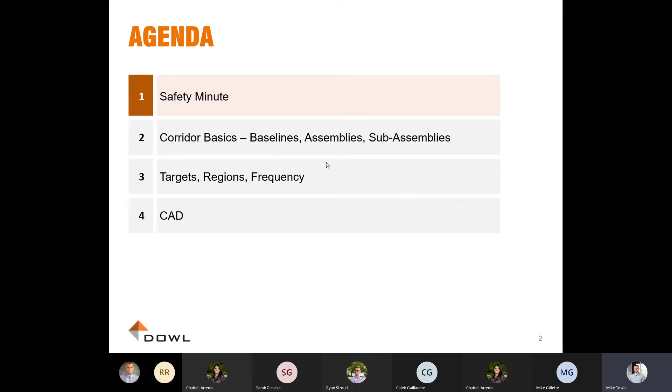So just a quick one as we're approaching Christmas time and New Year's. Theft does go up this time of year. My wife and I both had our cars broken into last week, as well as several others within about a 1.5 mile radius of our house, according to the Ring app. So keep in mind, make sure your cars are always locked. Keep valuables outside of your cars. If you are away, try and leave some lights on, or at least on timers. If you're having packages delivered, make sure that you're tracking those, and see if you can contact someone trusted if you're not able to pick that up right away off your front porch.

Follow up to Anna's presentation on Monday. Just be careful when you're cooking, and pay attention to stuff that's on the stove or in the oven, or if you are doing something outside with a deep fryer. I know some people like to do those. Keep any decorations, candles and lights in good working order, and always monitor any candles that are lit. Those are a pretty high cause of fires this time of year. Not much going on for most people with regards to travel this year. But if you are leaving for a long weekend, try not to post too much about it until you're back, so people don't know you're going to be gone. And if you are traveling, let someone know, just to keep an eye on your place while you're gone. All right.

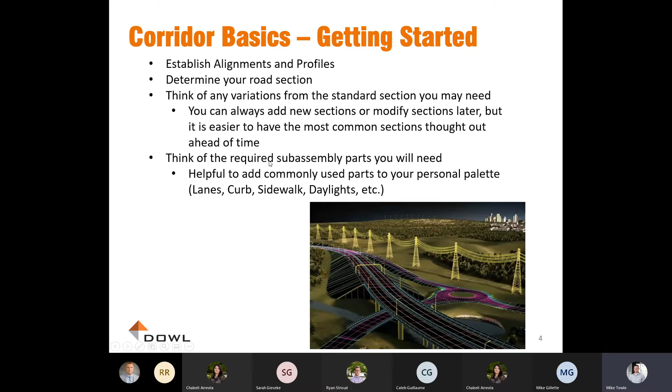So what are the required subassembly parts? We'll talk about what a subassembly part is, but effectively those are your lane pieces, your curbs, sidewalks, could be daylights, retaining walls, generic links for a stormwater planter, something like that. We'll talk a little more about those in just a second.

So the baseline is effectively the starting point of your corridor. The corridor is going to build outward from your baseline, and a corridor can have multiple baselines. Generally, those are established as your roadway centerline alignment. But your corridor can also have a baseline that could be your flow line, a curb return profile, maybe a saw cut line. It's essentially anywhere you're starting an alignment to work outward from to build your roadway section.

So that's kind of all the background stuff. I was going to jump into CAD. Does anyone have any questions on that before I get into CAD? Makes sense to me, Mike. Excellent. Well, I guess with that then, I will open up CAD. Can you guys see the CAD, or is it still the PDF or the PowerPoint? We can see your CAD. Excellent. All right.

So this is a project that we did down in Salem back in 2014. It was a Goodwill project that had the Goodwill building, 2 pad buildings. We vacated a street down the middle. We had frontage improvements on ODOT, frontage improvements on a city street, a new city street here, and a new extension of a city street here. So pretty extensive offsite improvements. Certainly not one you would try and do with feature lines.

I know that sometimes when we're just doing simple frontage improvements, it can be easy to want to just say, well, it's quicker and easier for me to just throw a couple feature lines on it and offset them back and call it good. But I really want to encourage people to think about what that is going to mean when potential revisions are needed, or when you get into needing to create your sheets for the submittal to the city, or whoever the jurisdiction is, in terms of what data are they going to require on the plan sheet, and how are they going to need to see it displayed.

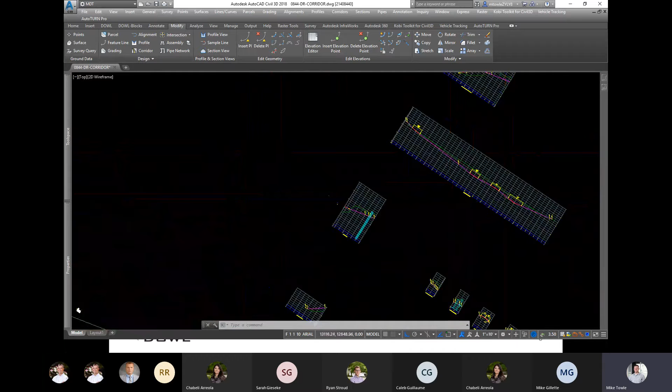So, I said the first step is establishing your alignment. So to save time, I just pulled the old file. We've got our alignments of all of our roadways here already set up. Over here, you can see we've already got all of our profiles built as well. So we'll skip that step. So the next piece is establishing what is your dominant roadway section. And we'll start with this one. So this one was effectively a 12-foot lane on each side with a 5-foot shoulder, and then a catch to daylight. And then we'll look at the second one. We'll ignore the swales because those add some complication, but it's all fairly straightforward once you understand how the corridors are set up and how they build the model.

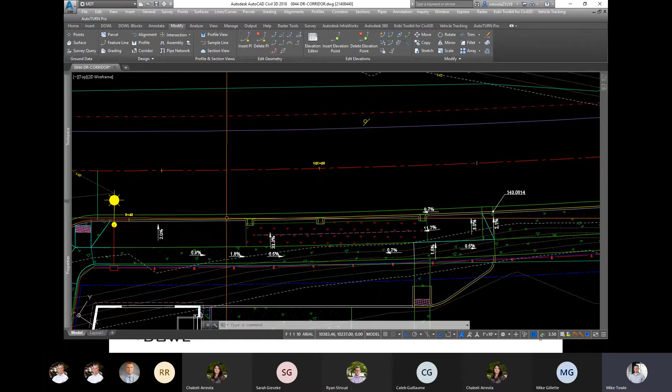So for now, we'll just assume that it's the roadway, curb and gutter, a planter strip, and a sidewalk. And in this case, because we're tying into our proposed finished grade surface, we don't really need a daylight on that section. So let's focus on, we'll build those two sections real quick.

And just as a tip that I always use if I'm working in corridors, is always have a split view. I don't think you guys will be able to see it, but with two monitors, I tend to basically minimize my CAD and then have the split of the two views centered on the monitors so I can have a full monitor view of each side. But, again, that's all just kind of personal preference. So let's go back over here.

And I'm sure you all know profiles and assemblies and stuff. This was the group of assemblies that we used to build the corridor model for this project. We'll kind of ignore those for now, but those all show up as true vertical. So this helps to have your 3D view set for one side or the other. So for now, we will ignore those. And we'll start with building our first assembly, which if you remember was basically just a 12-foot lane and a 5-foot shoulder with a catch line.

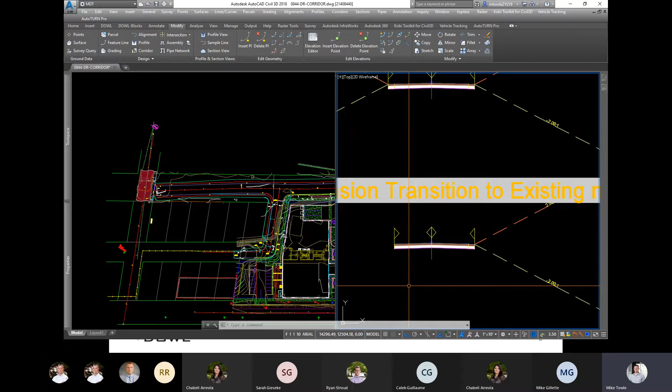So once you click that, it'll basically ask you where you want this to be placed. It doesn't really matter. Generally, I place them off to the side of the profiles and try and keep them organized by street. So you'll see all of these ones are Second Street. All of these ones down here are Melinda. And then I think I had some curb return ones up here. Yeah, so CR I use for curb return. So back to our assembly here.

So I think everyone should have a tool palette on the side that they can open up or add to a flyout window that's for Civil Imperial subassemblies. And I'll flip through some of these fairly quick. We've got some that are pre-built. I've never really used these. I suppose they work just fine, but it doesn't take a whole lot of time to just build one.

So your lane section, the one you're going to use the most is LaneSuperelevationAOR. That allows you, if you're building a detailed corridor, to add superelevation to it. That gets a whole heck of a lot more complicated. So if you are getting into a superelevated road section, I may be able to help. I've only done it a few times myself even. So that's generally the one you're using there.

Shoulders I don't really use. I don't really use medians much either. We're generally not getting into detailed enough corridors to do that. Curbs, I generally use UrbanCurbGutterGeneral. For some reason, sidewalks is in curbs as well. So UrbanSidewalk is what we use. And then this is a custom one that we have that I can send everyone, and you can load it into your tool palette.

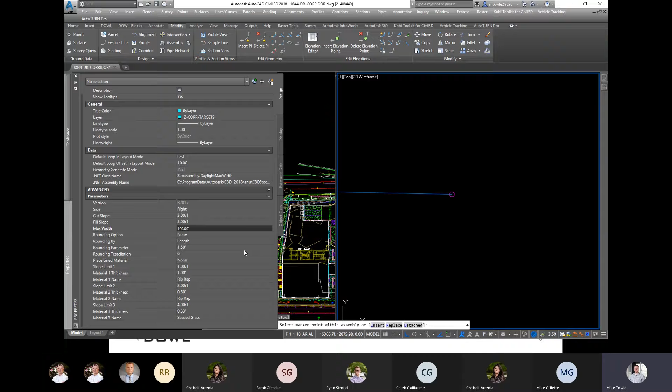If you say you don't care how far it goes to catch, you might want to just change that to 1,000 or 100 or whatever, something that certainly gets you beyond what you're looking for. That's generally the only things you really need to change there. And then it'll look something like that. It'll draw your line out to the maximum width that you typed in. So that is basically the right side of your assembly now.

If your left side matches, you can select the whole thing, right click and hit mirror, and then mirror it across your center line. Same side, no, sorry, here. It asked me if I wanted to mirror to the same side because I accidentally clicked the marker for the lane piece, the circle on the lane. But if you click the yellow X, that's the baseline.

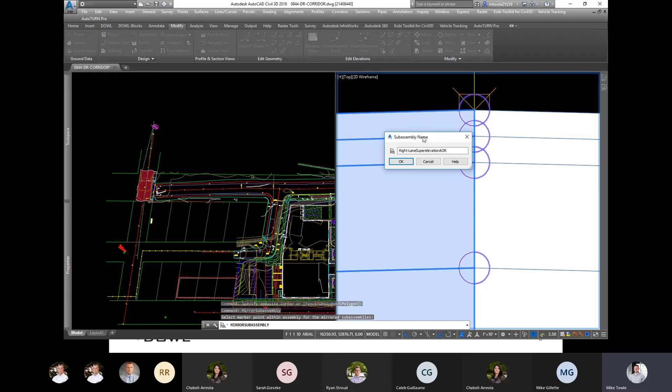So then what it'll do, it'll ask you to rename all those pieces. So it'll start from the baseline and work its way out. So now I'm on the left side, so I want to change that to left. I want to change this to left shoulder and left daylight. Okay, so that built your section there. If you needed to change the name of this for any reason, you can go to properties and change it up here. One thing that I also like to do is add a piece of MText below it.

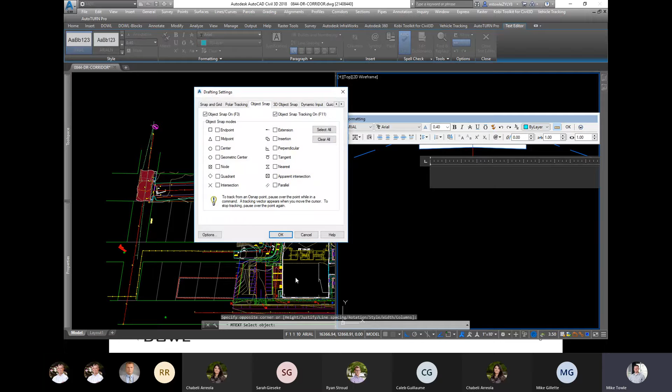And instead of just typing in the name of it, you can add a field for an object. And if you click this button up here, I don't know why the snap shows up, but you can just click on the baseline and it'll say the assembly, and you can click on name and it'll add the name of your assembly just below it, and it'll be linked to that. So if you change the name of this, it will update your MText after you regen, which is handy if you're looking at your assemblies and needing to quickly determine what you named something.

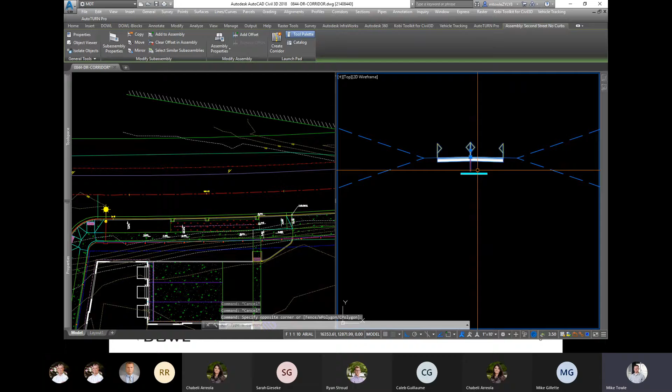So the other thing that you can do is, if you have an assembly that's very similar to this, so in our case, the next section that we have is with a sidewalk, but the left side stays the same, meaning it's just a shoulder with a daylight. So you can take this, and if you just select the baseline and the piece of text and copy that, it will copy the whole assembly. And if you regen, not rotate, regen, what just happened? Why did it name it the same? What do we got?

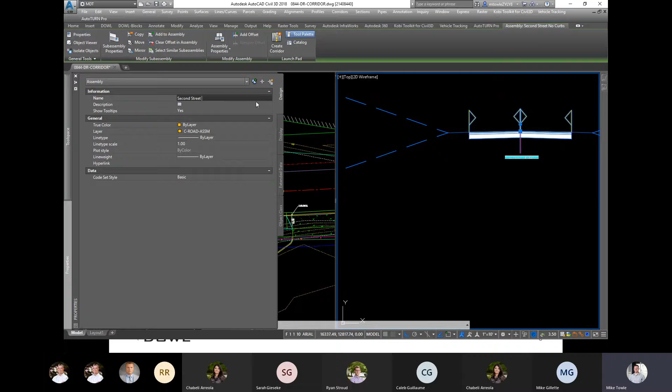Somehow those are the same name. But anyway, if you change that again, or 2nd Street sidewalk right, in theory, that piece of text should still be linked to the one that you copied. So you don't need to redo the field every time. As long as you copy the text with the baseline, it'll keep it.

So now we want to add a curb and sidewalk to the right side. So we can just select the daylight and the link and just hit delete. Go up to your tool palette again, add a curb here. Right curb and gutter, that's fine. And then urban sidewalk, and attach that there.

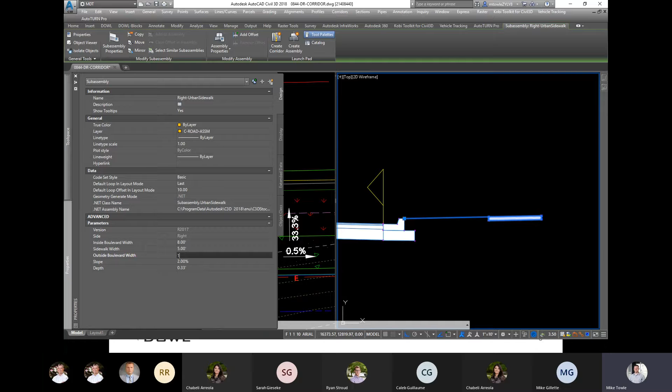And if you look at your sidewalk piece and go to the properties, there's an inside boulevard, a sidewalk width, and an outside boulevard. So what those will do is basically add a planter strip. So if you have an 8-foot planter, you can type in 8 feet. And in our case, our planter was 8 feet. Perfect. And then outside is, if you have a 1-foot separation to right of way, you can add in 1 foot, and that will only go at whatever the slope of your sidewalk is.

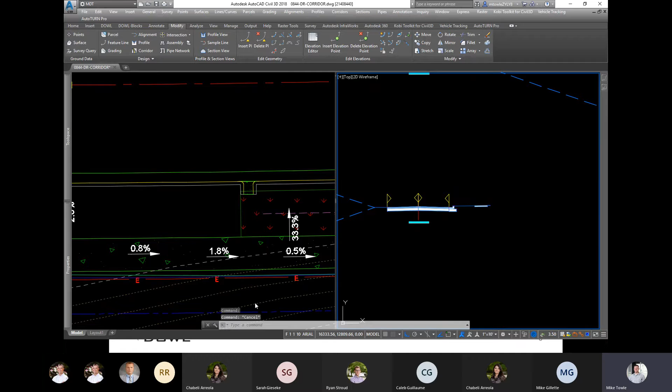However, if you have a variable sloped planter, you won't be able to use this for that. You would want to use a link, and you'd have to set a vertical target, and I can try and explain that later. We probably won't be able to actually build that, but we can talk about it. Okay, and then again, since we were tying into our proposed surface on site, we don't need a daylight over here. So let's just go back to one view for now.

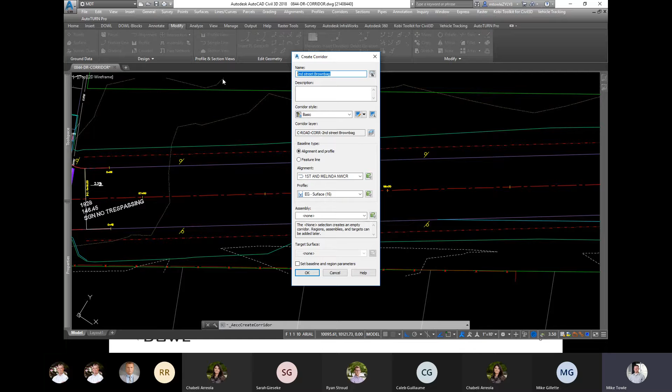So if we want to start building a new corridor, now that we've got our assemblies built, you can come up here to corridor and create corridor. Even if you have multiple roadways, you're likely only going to build one corridor model. If they're completely separated, you could build two. That would be fine. But if you've got an intersecting street, for example, this street and 2nd Street would be the same corridor model.

So when you're creating a corridor, you don't necessarily want to name it just 2nd Street or Melinda. You'd want to say offsite corridor or public street corridor, something descriptive that doesn't make it seem like it's only one of the streets. Corridor style basic is generally what we want. It'll always set up one baseline first, meaning it's going to start building whichever alignment you pick first. So in our case, we're going to build off 2nd Street first.

So it's asking what the baseline type is. Generally, we're going to build this off an alignment and profile, but technically you can build them off a feature line. Again, I wouldn't recommend that for a roadway. You should always be doing alignment profile. So if you're doing alignment profile, we'd want to select 2nd Street right-of-way center line, and your profile, assuming it's a new street, would be your FG, your finished grade center line profile.

Then it'll ask you what assembly you want for the initial build out of your corridor. You can leave this as none, and it won't really build anything at first. You can always add regions and change that later. But if 90% of your corridor is going to use the same section, it might be helpful to select your most common section and have it build all the way through, and then split and change regions as you go. If you have a lot of different regions, it may make sense to select none and build your corridor one segment at a time. So in our case, I'm just going to select no curbs and say that's our dominant corridor section.

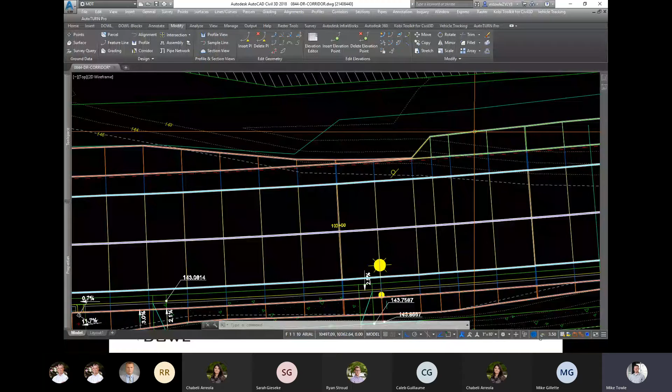You can see it calculates your catch line to existing. That's the outside line here. If it's green, at least in this style, green would mean you're in a fill, red would mean you're in a cut. So it differentiates between the cut and fills on your daylights. Where they come together, that's basically your transition point. So you can see, it basically built it out.

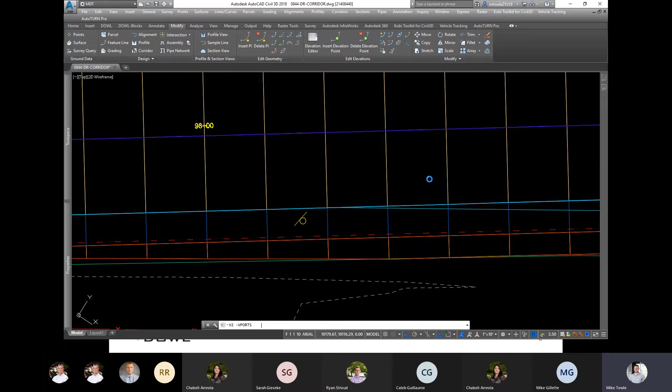The edge of roadway is right underneath the edge of the corridor. So each of these lines that's now drawn here represents basically a feature line that is built by the corridor on those endpoints of your assembly. So that is the outside edge of your lane. So every one of these circles effectively gets a feature line built at that location. And then again at the end here.

So you could, if you wanted to, extract those feature lines and use that as part of a tie-in. That might be what you'd want to do here. If you were tying your on-site surface into the off-site, you'd extract that feature line and add that to your FG surface on site to make that tie-in.

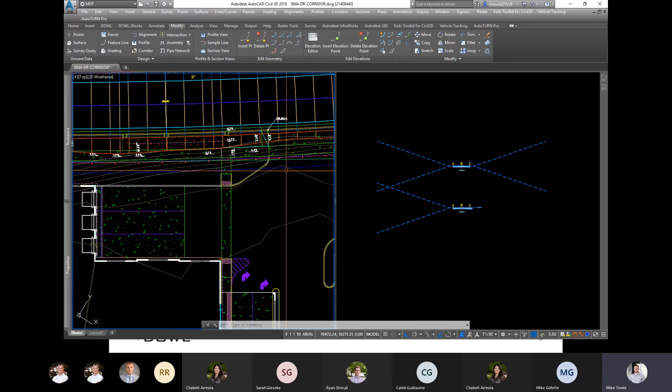With that said, we now know that we don't want to take this section through the intersection, because once we're on the other side of the intersection, we have a sidewalk. So if you want to basically switch a section to your sidewalk, you can click on the corridor. And you can see that it brings up basically a corridor ribbon. And this is really helpful for editing and adjusting kind of everything there is about your corridor from a design standpoint.

So this modify region tab basically lets you split a region, meaning if I split a region here at the endpoint of the curb return on this side, first it asks you which region you want to split, and then it'll ask you for the station. So these two sections are now different regions in the corridor. Granted, they're still using the same assembly.

So if you wanted to change that, you could click on region properties, select the region, and you can change the assembly to sidewalk right. That's what I wanted. And you can see that it'll change that to be your new section. So across an intersection, I don't necessarily want to build sidewalk here. So I'm going to split that region again, select it.

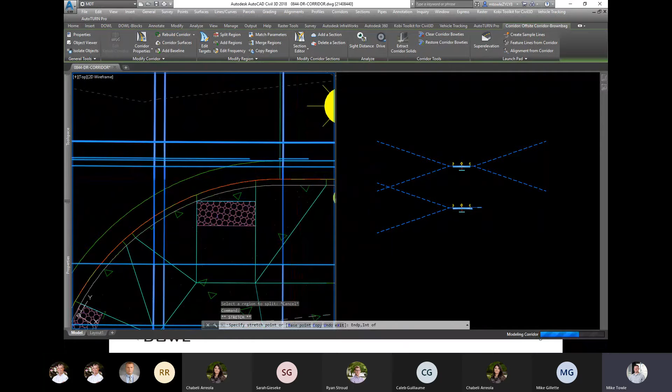And if you accidentally click the wrong spot, you can always just grab that grip and click on wherever you want to move it to, and it'll slide it to that point. Alternatively, you can right click and go to corridor properties and go to parameters. And you can see when we started, there was only one region under the baseline.

There's now 3. And you can see that it basically just changed the name and said no curbs copy, no curbs copy 2. You can edit those names to whatever you want. And it can be helpful to basically name those so that they match your assembly section.

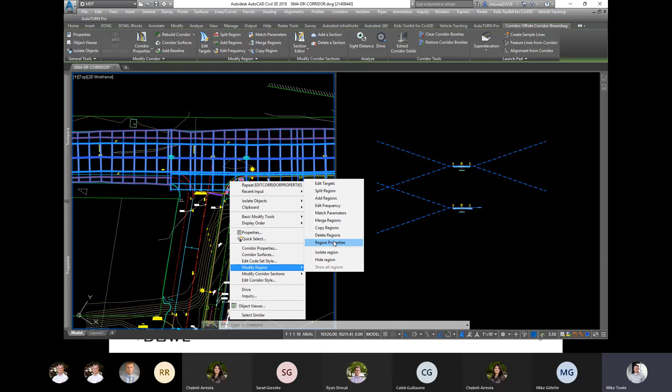Now that you've got that kind of split, again, we don't want to build sidewalk across here, so I'm going to modify the region. Again, you can right click on all this stuff, or most of it shows up in the ribbon. So if you wanted to modify that one, we could say 2nd Street, no right. And we didn't build that one. That's one that I think we had in there. I'm assuming that's what that was. Sure, that'll work.

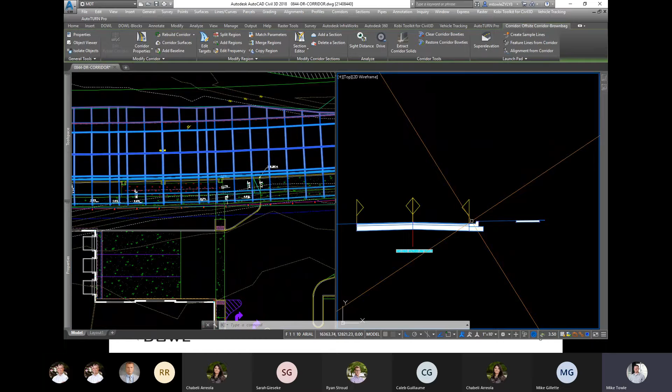Okay, so we've got kind of the main section of the corridor built. You can see it's calculating effectively to the back of walk, except where we got to this point, we had a wider road section. So we went to a 15-foot lane instead of a 12-foot lane. So if you recognize that, you can just come over to your assembly and change the width of your road.

And you can see it didn't do anything in the corridor yet. So you can click on it and hit rebuild corridor, and it'll update it automatically. And it'll recalculate all of those grades across your section to that point.

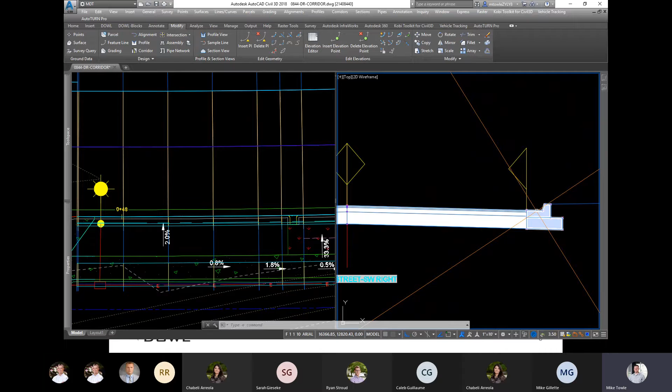The other piece of that is you can see that we've got a curb and gutter section in our assembly. So if you're not modeling that gutter, or if your road doesn't have a curb and gutter, then you need to change that gutter piece. And the curb is one of the more complicated ones to edit, because all it says is dimension A, B, C, D, E, F, G, and you can change all of those dimensions. Keep in mind, those are all in inches.

So to understand what those are, you can go to the tool palette, right click on it and hit help. And there's this kind of handy diagram that shows what all of those dimensions are. So the most common ones that we update are B, D, F, and E. So F is the top width of your curb, from the top face to the back of curb.

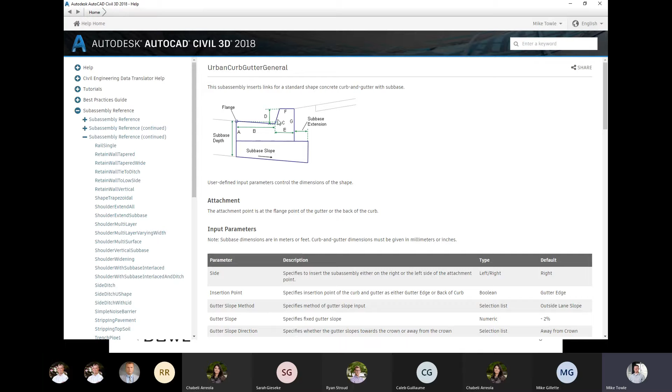E is the bottom width, meaning that when a corridor models a curb, it models it as a 3-line curb, meaning it's going to build 3 feature lines. When we model on-site curbs, we're generally drawing them as 2-line curbs, meaning bottom face and top back.

A corridor is going to model all 3 because a corridor cannot, I suppose you could do it with a 2-line and just skip this and you'd have to use a generic link, but a corridor cannot have a true vertical. You can't have 2 XY coordinates with the same elevation to it. So it's going to have a batter on the face of curb. So you're going to want to set F.

If you truly want to draw it as a 6-inch curb, you're going to want to try and draw F as 5 inches, E as 6 inches, and that'll make this line here, your flow line and your top back, 6 inches apart. And then B is your gutter width.

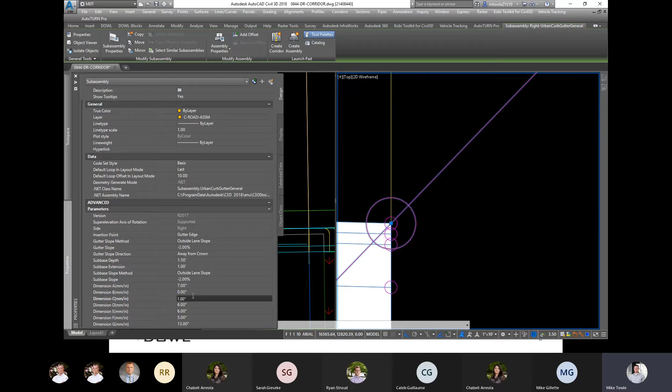And you'll see that if you type in 0, meaning no gutter pan, it freaks out because it's trying to put 2 points on the same location. So you want to put 0.001, and it'll basically fake in a point that is 1/1000th of an inch off. So it never impacts the model.

If you are modeling your gutter, you can change a couple different things. You can change your gutter slope, and if it's a shed section, you can change the slope of that going either negative or positive, and you can change the width of it again, using that B dimension. So hopefully that all makes sense. Again, so we just made a bunch of changes there.

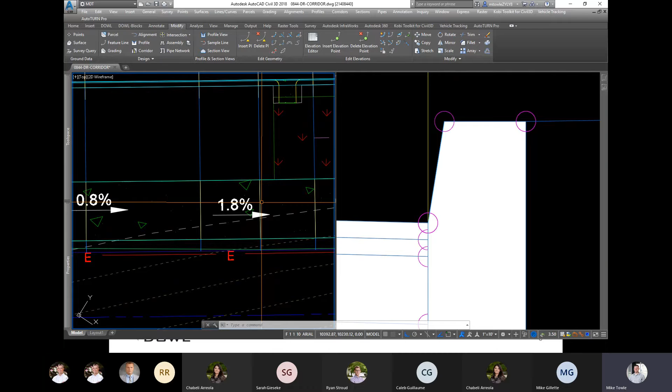Let's assume that we are not modeling a gutter pan. We don't have to change it again. And then you can see everything now lined up. The curb is on top of the curb, sidewalk's on the sidewalk, and we've got basically the sidewalk width and then a 1-foot extension at 1.5%.

So with that said, let's say that we realize, well, shoot, we needed to transition this part of the roadway here to a 15-foot width also. So that's what this is. So our road width changed at this point, once we came around this little curve in the road, it's going to slowly transition to 15 feet from 12.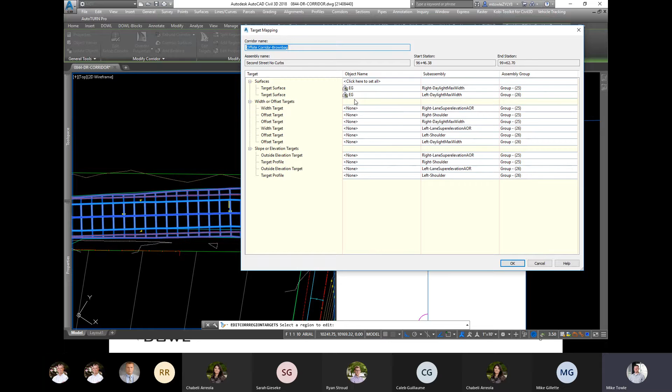So you can go into, again, select your corridor. Under modify region, you can click edit targets, select your region, and here's where the naming becomes really important if you have multiple assemblies or sub-assemblies within the same assembly. So it's gonna break it up into a couple different things. Surfaces, which is effectively your daylights, or any links that are linking to a surface.

It's going to break it up into width targets and then slope or elevation targets. So you can see that some of these are named, right lane super elevation. That was our pavement section. That shows up in both width and slope or elevation. That means that you could, if you wanted to, target a feature line or a profile with this right lane subassembly piece, and it would change the elevation regardless of the default slope that you put on that subassembly.

If you say we put 2.5%, if you have a feature line or a profile, you can target that profile for just a portion of your roadway, and it will change the grades and calculate the cross slope from the center line to whatever that profile elevation is. Does that make sense? Hopefully. Yes.

If it doesn't, feel free to raise your hand and I'll try and explain that differently. So a width target functions similarly in that it will target a line horizontally and adjust the width of the lane piece. So if you only pick a width target, it will continue at that width until it hits that line at whatever your default slope on your subassembly part was. So in our case, we don't want to change the elevation. We just want to change the width.

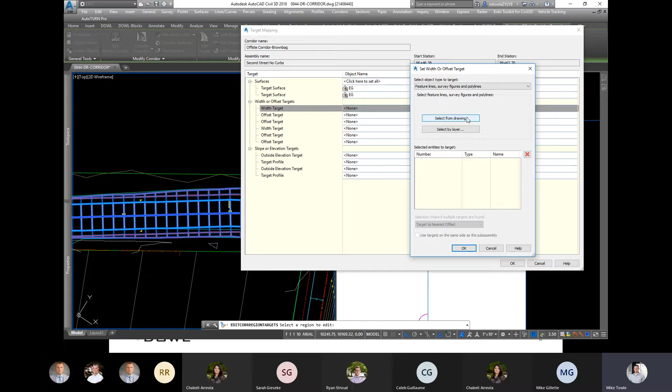So it gives you two options, either alignments or feature lines or polylines. I generally do all my targets, unless I've got a curb profile or something already drawn, I'll just generally draw polylines. Because generally you're just basically taking a nested copy of a curb line or something like that, and that's your target. So you can hit select from drawing, and then you can click on your line.

I will generally put all of these on a Z-corridor targets layer, just so that they're clear as to what they are. And you can see that what it does is it basically adds that as target number 1, it's a polyline, and then it adds a generic name to your polyline. You can have more than one polyline target per region for the same subassembly piece. And what it does is it'll go to whichever one it finds first, building out from center line.

So if that's the case, you can see if you named all of these without a right or left, it would be pretty much impossible to identify if you were on the left or right lane, or if you had more than one lane, it would name them both right lane super elevation AOR or AOR-1 or -2 or -3, however many you had. And if you didn't label them, you would never know which target you need to set. So that's why the naming piece is really important, especially if you're using more than one of the same piece per assembly.

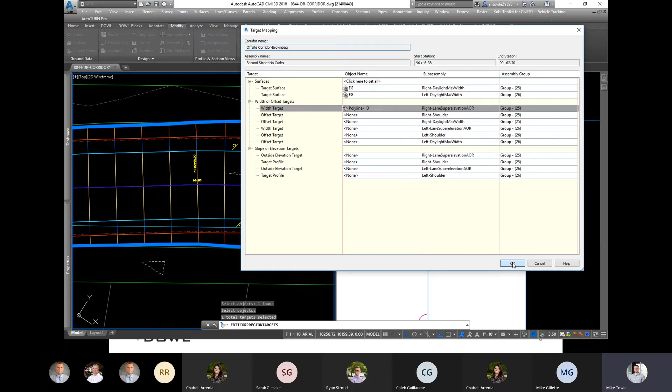Okay, so you saw that updated when I hit OK there. It basically took the width of the roadway now out to that target line, and then it adjusted the shoulder, adjusted the catch line with it. So one thing that's helpful with this is, before you even got any farther, you saw that our catch line is now outside of the right-of-way line. That would show that we'd need a wall or a steeper slope or a narrower shoulder, or we need to potentially offset the center line, or do something to the roadway section to avoid grading on someone else's property.

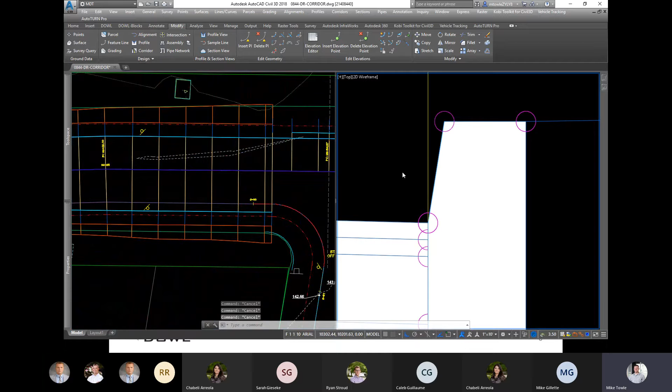Okay. Anyone have any questions? Well, I guess let's do this real quick. Let's look at frequency. I'll show you what that means. So this was our centerline profile for 2nd Street, and you can see we've got a couple different vertical curves, from 102 to 102.5, and another one from effectively 103 to 104. So those are somewhere right in here.

If we wanted to have a more frequent sample point along there so that it calculates the vertical curve a little bit smoother and makes your contours show up a little cleaner, you can again click on your corridor under the Modify Region tab, which, you can probably guess, is the one you use the most. You can click on Edit Frequency. And then again, it'll ask you which region you want to pick. We want to pick this one, if you only wanted to modify it for this one. If you wanted to change it corridor wide, you could go into the properties and change it for the whole thing.

But you can see here, this window pops up and it says you can increase the frequency along a tangent. I generally leave that around 10. If you've got a really straightforward road section that doesn't have a lot of grade breaks or horizontal change to it, or really any difference in the profile, say a 1,000-foot long road at 1%, you could probably increase this to 25, but most of the time we're doing small enough frontages that 10 probably makes sense.

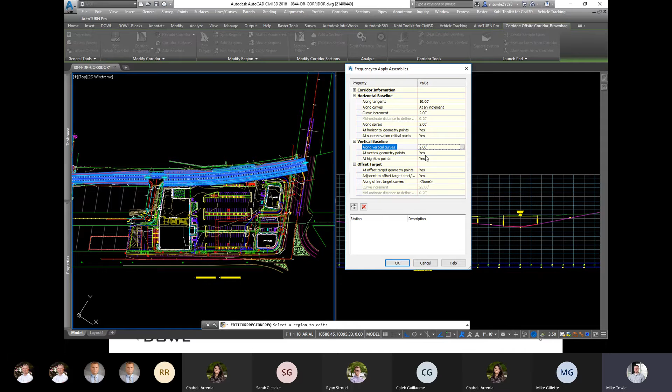You want to make sure that if you do have a target, you always have one at the geometry points of that target. So you'd want to have this at yes. And then make sure that you've got these boxes checked yes for high points, low points, any vertical geometry changes, horizontal geometry changes, things like that. So if you hit OK, you can see that effectively this whole thing is one giant curve. So it added a lot more sample points along the corridor length.

And you can see over here it didn't add anything. So if I were to change that back to 10 for a horizontal curve, you can see now it's only adding them at the vertical curve locations. So that's the frequency. If you needed for whatever reason to add a single frequency point or delete a frequency point, you can do that here.

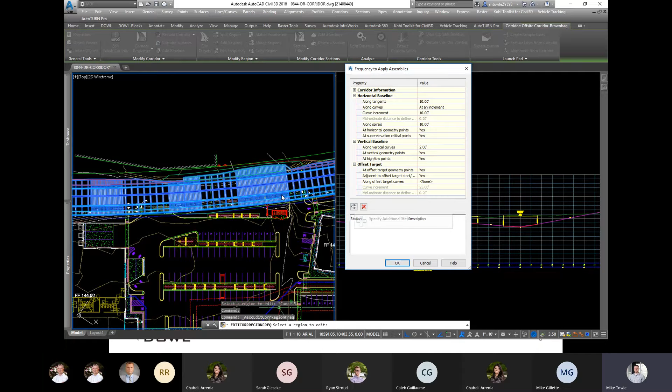Actually, I don't think you can delete a sample line. You can delete ones that you've added, but you can't delete one that's calculated by the model. But if there's a specific point that you wanted to have a sample line through, you can add one here and just select a station. Okay, I think that's the basics of building a corridor. But you'll notice that there's no surface here yet.

So to do that, you can click on it and click Corridor Surfaces, and it'll bring up this window here. There's a couple things that you want to do here. We're generally always building a top surface. But in theory, you could build a surface that's your subgrade, or a surface that's at the first lift of pavement, or whatever that is. Again, that's for building quantities or public road job type corridors. We're generally always going to want to build top.

And then you can either do data or links or feature lines. I'm pretty sure you want to build it as links. And then you can click create a surface here. They'll name it FG offsite corridor. You can change your surface style, whatever you want that to be. These don't really matter. And then you'll see that there's not really much you can do here. You have to click this plus to add the data to it. So it built the surface, but it wasn't going to have any data associated with it until you click that plus button.

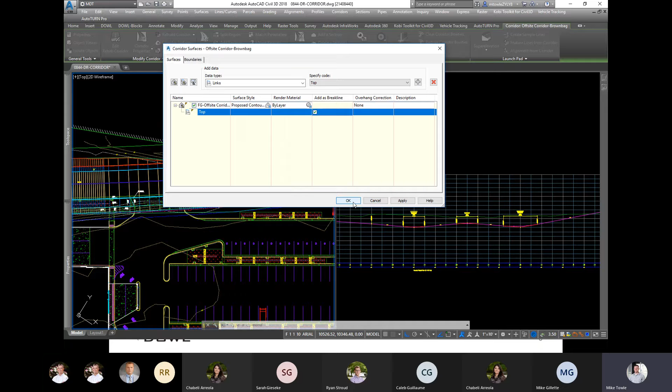And then I generally always click add as a break line. What that's going to do is add a break line at all of those marker points in your subassemblies. So if you hit OK, rebuild the corridor, now it'll add your surface. Let me see if I can turn that up. Actually, surface edit. So if you're looking at it from a TIN standpoint, it's going to add a TIN line across your baseline, across the edge of your lane line, your outside shoulder, and then out to your catch line, and then triangles between them.

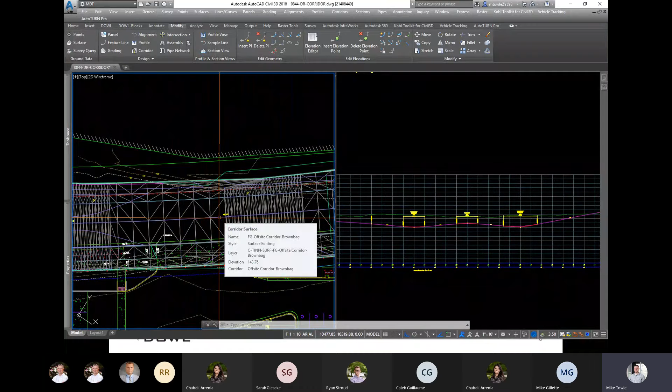You can see in vertical curves it makes your contours pretty smooth. They're rounded. You don't really need to add a smooth surface to a corridor. I would highly recommend you don't add surface smoothing to a corridor. In theory, if you built it right, you really shouldn't have any of those issues where you're tinning across center line, unless you're starting to mess with flipping faces. In very rare circumstances do you really need to change the way a triangle is tinning in a corridor if the corridor is built correctly.

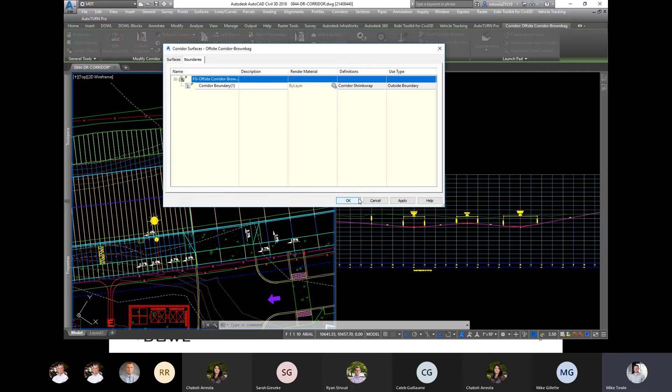What you do need to sometimes do is, you'll see that where we had our transition from a cut section to a fill section, it's tinning across those boundaries. So you can do a couple things. You can draw a boundary around your corridor, which is what I tend to do. I think it's easier and it works a little better, but you can get lucky sometimes and add a boundary that says add the corridor extents as the outer boundary. And that sometimes works. Let's see if it does here. So it worked in that case.

Where it tends not to work is occasionally if you start adding multiple sections to it, or having to add feature lines to the outside of it, or within your corridor limits. If you really want to think about how the corridor is going to build, you can build ADA ramps in your corridor. It takes a little time. It takes a lot of thought in terms of how the assembly is built, but in theory, you can do it. I generally don't do it that way, but what I do is build the curbs and then build the ramps with feature lines behind it.

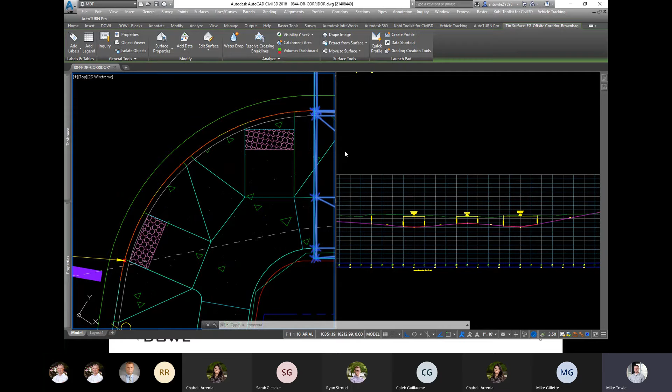So I try and get through top back of curb using the corridor, because those will always then be controlled by your profiles. When you're designing a road, the thing that changes most frequently when you're changing grades is your profiles. So your design of roadway is always built off profiles. And if you've got your curbs built in your corridor based on those profiles, then your back of curb is always going to be accurate.

Let's see. Does anyone have any questions on anything we've gone through so far? Those are kind of the high level basics of it. Does anyone have any questions on seeing an example of something? I was going to try and touch on what you do at a curb return or an intersection next. But does anyone have any questions on what we've done so far?

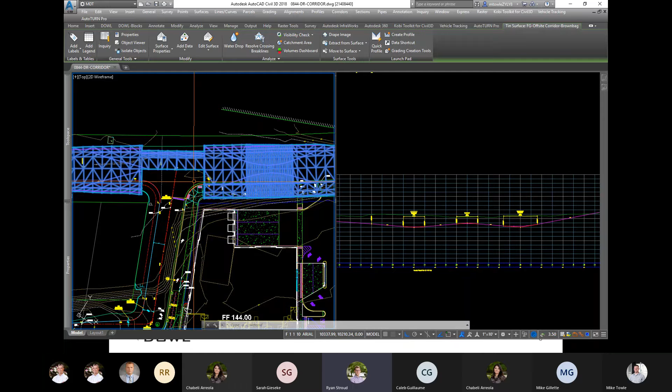I think I understand it to an extent. I'd have to actually do it to make sure I know it, but I think I got the concepts.

Yeah, the main thing with it is really understanding. You really have to understand how to build these. If you understand what assemblies you need, it's super easy to maintain a corridor. Once you have it built, and you make an adjustment to the profile, it recalculates all the grades automatically. I could go over here to this profile and take this point and move it up to here, and it would rebuild the entire corridor automatically.

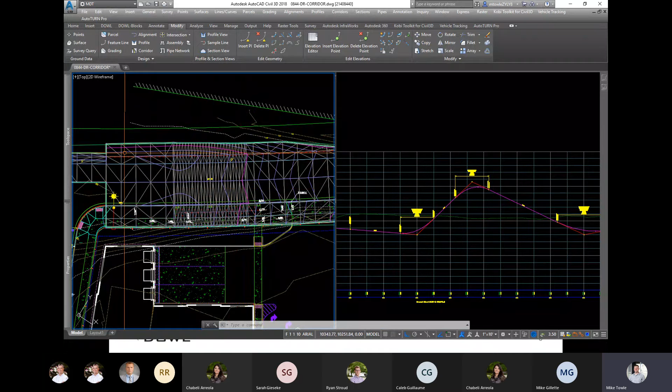So the benefits of that are, obviously, I now don't have to update however many feature lines it took me to build this road cross section. And I never would have been able to build a vertical curve in the profile to begin with. But those are the benefits of a corridor versus feature lines when it comes to a roadway.

And just as a heads up, if you are doing a lot of modeling or updates to your corridor, I would always recommend not having rebuild automatic turned on, because it'll drive you crazy. Every little thing you do will update and it'll rebuild the whole corridor. This one's pretty simple, so it rebuilds pretty quick.

But if you've got a really complicated one with a lot of different regions, a lot of different target or frequency changes or vertical curves, a lot of different baselines, it can take a decent amount of time to rebuild every time. It can take 10 seconds to rebuild. And if you're making a simple change to one little thing, to have to wait for that to rebuild every time is pretty frustrating.

So anyone else have any questions on that? I want to touch on intersections, then I want to give at least a rough idea of how we do half streets. And then I can show you kind of what the overall corridor for this whole project looked like when we were done. But anyone else have anything they want to go over on this piece? Okay.

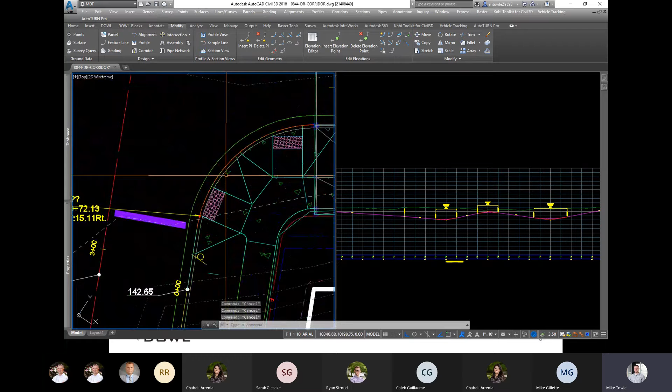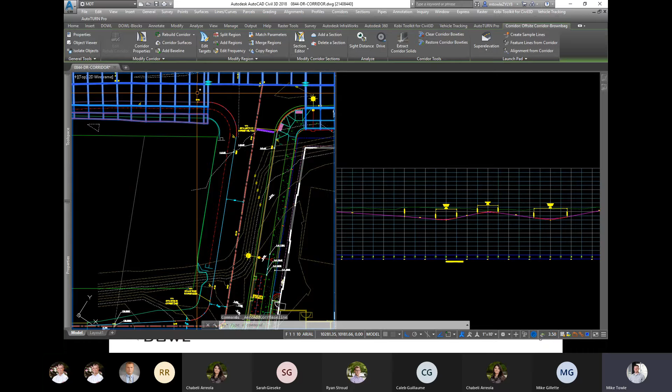So if you add a baseline and you want to start adding regions to it, you can go into your corridor properties. Your baselines are the furthest out in the tree here. You right click on that, add a region, and then 3/4 no ditch. Sure, doesn't really matter. Yeah, it's not what I wanted, but that's fine. Again, you can always just change the extents of your region by just dragging it over.

Okay, so at an intersection, you need to at least somewhat understand how the roadways are going to tie together. Meaning, if they're both crowned roadway sections, generally the higher classification roadway will maintain its crown, and the other roadway will transition to tie into it. So if this one is crowned and this one is crowned, this one may have to transition its crown to line up with the cross or longitudinal slope of the intersecting road. Hopefully that somewhat makes sense.

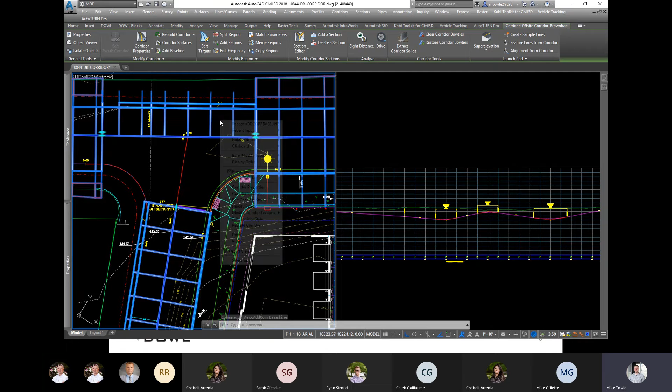Second Street and Melinda. So again, we added baseline, but it doesn't show up. So corridor properties, add a region, and curb return. We'll just pick the basic one here. We'll just say it's full height curb around the whole thing. Okay.

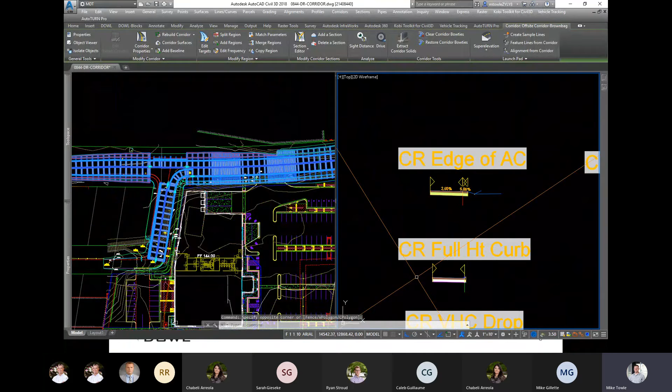So the way that curb return section was built, you can see this is where it's important to know the direction of your alignment around your curb return. But full height curb, so all it is, like I said, I build curb returns basically to the back of curb, especially if I've got ramps. If I don't have ramps, then you might build to the back of sidewalk, but generally you're not going to have a curb return anymore that doesn't have a ramp.

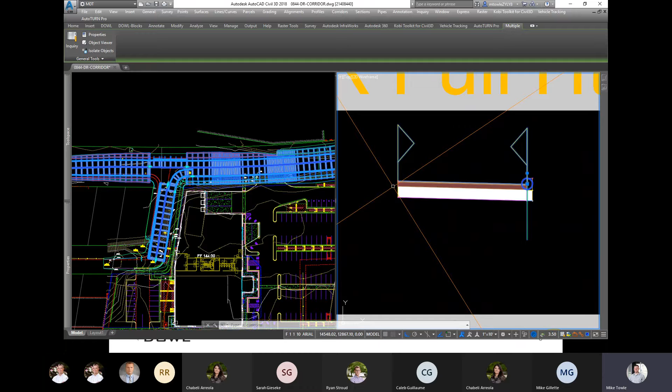So curb return is, the baseline is your flow line, and then your curb is to the right or left, depending on what direction your curb return alignments are going, and that should be based on jurisdictional requirements and what way they need to see profiles and how your views are laid out. And then you have a lane piece to the left in our case. So when you're targeting this, you can see that this is just going out for 10 feet, whatever that may be.

And you can also see that the limits of the corridor section, the baseline, are extending over the roadway. So we don't want that. So we want to pull our region limit back, so that the curb return stops at the actual PC of the curb.

And then you want to edit your targets of that curb return, and your width target is you're going to select an alignment, and you're going to add Melinda. Melinda is the intersecting street, the T street. We're going to add that one. You're also going to add 2nd Street, the center line of 2nd Street. And your target is going to be your profiles of those.

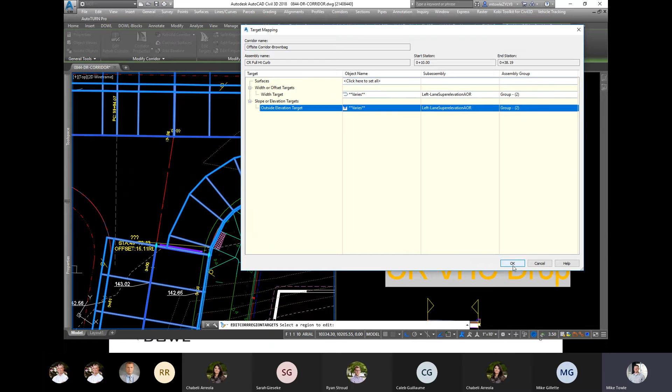So when you're targeting a profile, you first have to tell it what alignment you're going to try and find the profile from. We're going to target the FG, and then we're going to target the 2nd Street FG. Hit OK, and what it's going to do is it's going to build out until it hits the first one that it comes to.

So once it gets to this point, it's going to switch center lines and go over to this one, and it's going to transition that lane across and target the profile of both of these. Once it gets to that merge point, it'll switch profiles. This is one where you would want to increase the frequency of your corridor sampling, because this will help play out that transition.

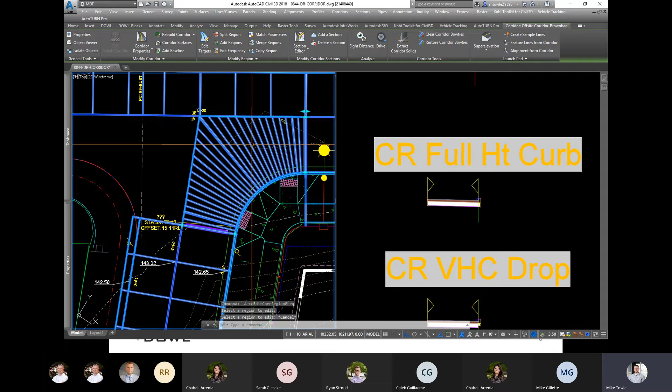I'll warn you, you can get this a little bit too tight of a frequency, and it'll make your contours really jagged. So just play with that and make sure you're getting enough detail in your intersection to actually have it display correctly. So I'll turn the surface back on real quick. Oops.

So you can see now it's doing a blend of these two. You can see a nice crown in the contours here, and then it's blending into the crown of the roadway coming down Melinda. And then you would do the same thing on this side once you plugged in whatever that section is. This one obviously didn't have a curb, so you'd pick a different curb return section, and then those would all blend together.

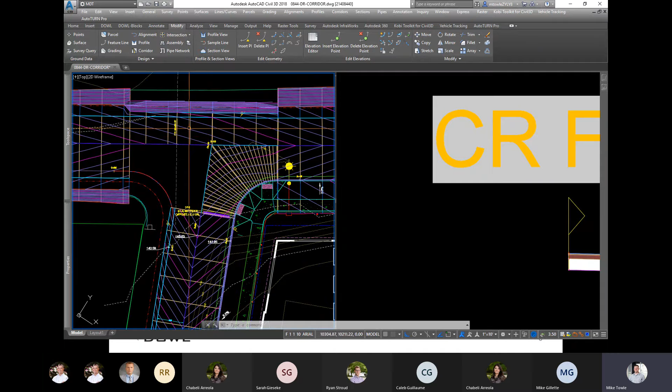I'll explain ramps real quick. So I mentioned we have that variable height curb piece. So along your curb return, you can split, again, go to split region, click your curb return, and then you'd split it at the top of the wing. That would create 2 sections. Then you'd split it again.

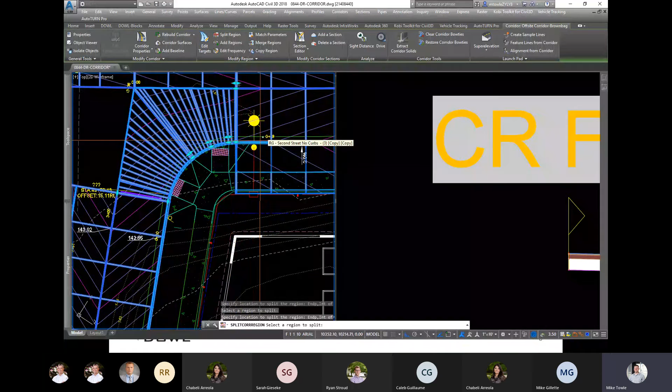You'd select that region, and you'd select the bottom of the wing. Then you'd split this next one again and click the bottom of the wing on the other side. And then this one you'd have to split so that this continues further, and you change your roadway corridor region so that it doesn't have a right side for this first 5 feet or whatever. But let's just say the top of the wing is at the end.

So again, you can go to, not corridor properties. Well, you could, but I think it's easier to go to region properties and then select curb return, variable height curb drop or rise.

So drop is the start point. So again, it's always going to build up station. So it's going to start at the lower station and go to the higher station. So it's important that you get these in the right order. So the variable height curb, when you're adding it to the assembly, looks just like a regular curb piece.

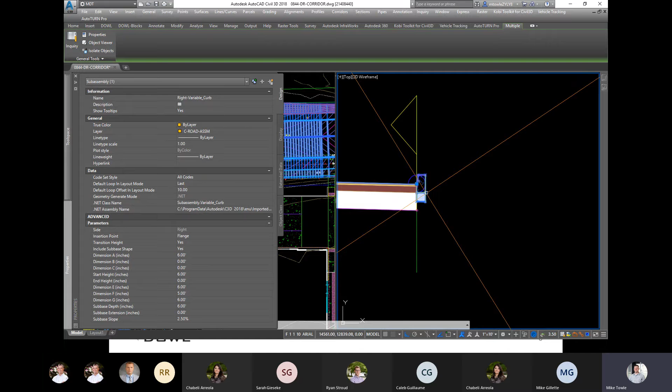But when you add that in, if you go to the curb piece for the drop and you look at the properties of it, I think it's A is the start height and B is the end height, if I recall correctly. Oh, no. It's the start height and end height parameters that you want to change. And this says feet. Don't be alarmed. That is inches.

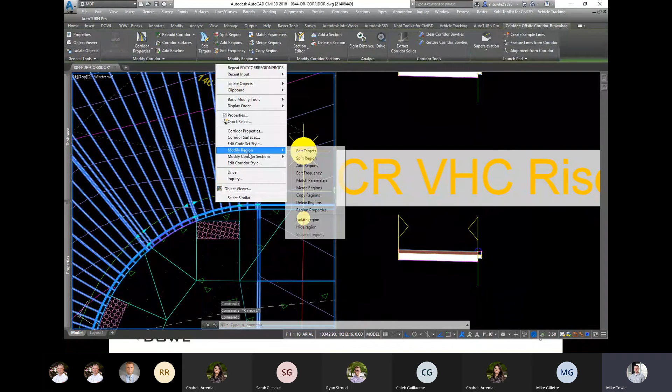So what that now does is it'll calculate the start of this region. It'll know that the start height is 6 inches, and by the end of the region, it's going to calculate a variable height across this curb and take this to 0. Then you would change this region here to be a curb return flush curb. And then you change this next one to be curb return variable height rise.

And in theory, you can see the contours slowly dropping down the wing. It would then be flush across the curb, and then you'd see them rise to get to full height exposure. So because of that piece, that is why I always build the curb in the corridor and then tie your feature lines into the back of it. Does that make sense to everyone? Kind of, hopefully. Anyone have any questions on intersections or the variable height curb piece?

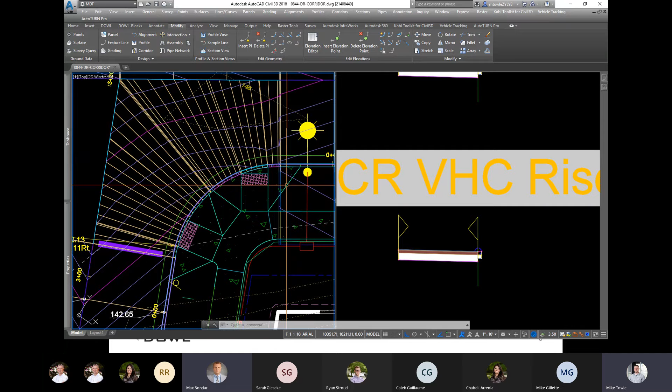Hey, Mike. So, I don't know if we want to get into too much detail, but how would you deal with that situation right there, the right wing of the one here? Yeah, to make sure it builds to not full height at that. Would you extend the station, or would you?

Yeah, so what I would do is your curb return profile, and this is another reason why you generally always build your curb return profiles to extend beyond the PC and PT, so that you can get an extension on that if you need to. And again, because you're targeting center line, your contours are going to be the same regardless of if it's building from the curb out or from the center line out.

So what you would end up doing is, if you needed the left side of your roadway to be different than your right side, you could just extend this no right section, where it's just the left lane and then the catch line or whatever's on this left side. You could extend that, or you could even split your baseline region of your main roadway. You could have another point here. You basically deal with that in your main roadway and then extend your curb return profile further around. Got it.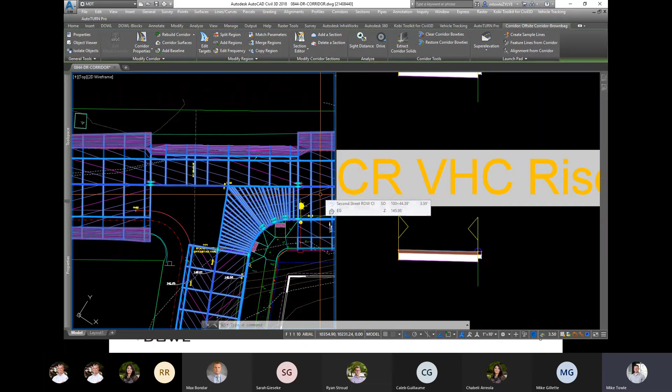And again, like I said, there's ways you can build these ramps in your corridor. I sometimes build my driveways in that because they're a little bit simpler. But if you wanted to do that, you'd have to do a bunch of links or sidewalk pieces that are targeting each of these, basically your ramp wing, your top of ramp, and then your end of ramp wing. You target a feature line for width and slope, or width and elevation, and it'll build that in, and then it'll build to the back of walk.

But you got to keep in mind that it's always going to build your sample lines perpendicular to your baseline, which isn't always how you need to calculate cross slope of your sidewalk, which is why I don't often do that for curb returns.

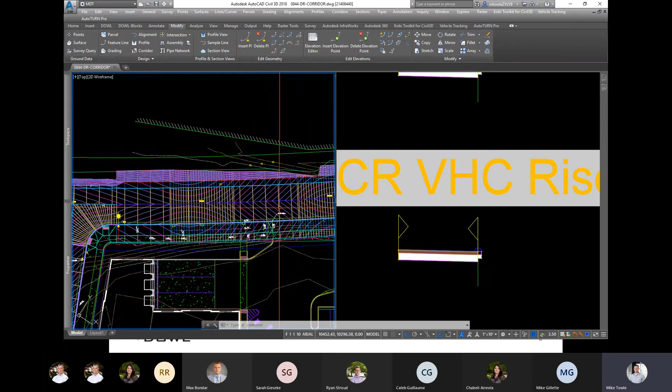So I'm not going to actually open a corridor model of a half street, but they're effectively built the same way. You know, most jurisdictions want you to profile center line, and they want their alignment and stationing based on center line. So you would build it the same way. Let me see if I can just build a quick assembly here. Half street.

Sure. So if you're building it off center line and your saw cut is, say, 10 feet away, or say it's variable, you can use these generic links as the first one. Again, you can do width link offset and elevation, or link slope to an elevation. I think it's link offset to an elevation, or link offset on surface. That's the one you want.

And no, that's not the one you want. It's link width. I think it's width and slope. And I think what you can then do is add a lane to the backside of this. Say you didn't have a pavement section or a curb. So say that was your half street, and this was the start of your saw cut. So the slope doesn't really matter. The width technically doesn't really matter either.

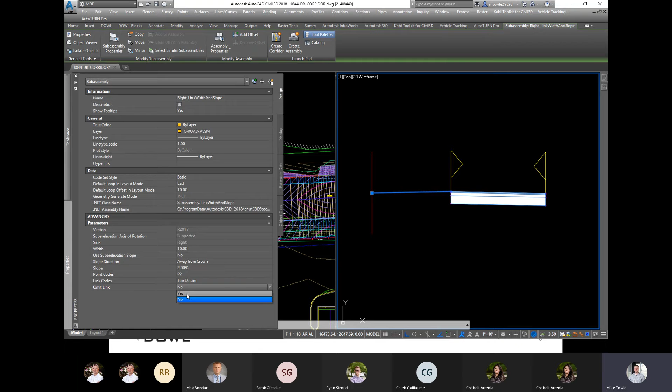What you can do is select this link, and under properties, there's this parameter that says omit link. If you say yes, it won't build that link in your surface model or in the model. But what it can do is, let's do this quick. Add a region here to there. I didn't name this anything, did I? Sure. What did I name this? Half street.

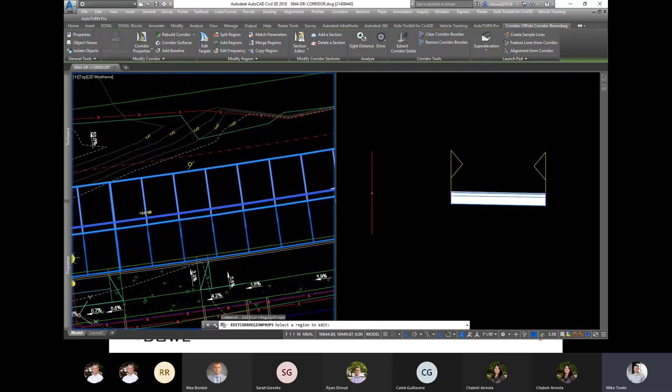So you can see what that does is it builds your corridor off the center line, but it's starting it out here because we've got this link in here that's going 10 feet at a specific slope. If you were trying to build this basically to a start point, you could either cut a profile along your saw cut line, which occasionally we have to show anyways, at which point you could then target that on your width and slope link.

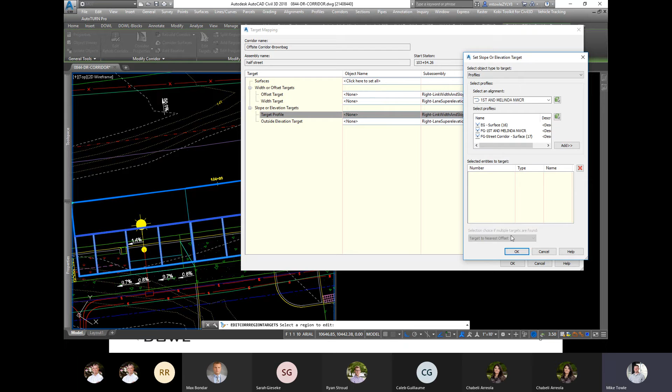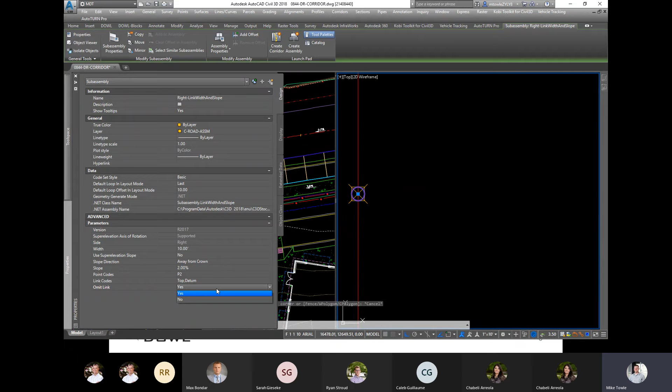You can target that alignment, your saw cut alignment, and then target a saw cut EG profile. And what that would do is it would then basically model out to this point in the background, calculate these elevations along the existing profile, and then build your lane based on that. That makes sense? Kind of. I know I can't show that very well here because I don't have a, I don't think.

Yeah, that just says the target. I think that's the best one. Let's see. Did Halvorson leave? Halvorson, do you know if I'm missing one here? I thought you could target a width to a surface. It could be offset on surface.

But anyway, that's probably good timing because I think my computer just froze. Oh, it's because I just deleted the entire corridor. I wouldn't recommend doing that, by the way. Make sure you don't have the corridor selected when you hit delete. So anyway, any questions on any of that? I know that was a lot to cover in an hour, roughly, in CAD.

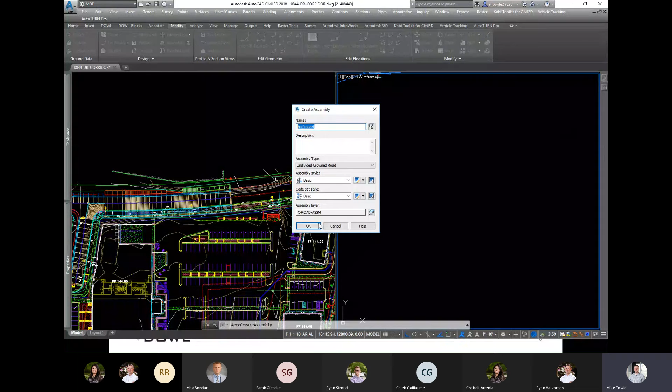I was going to try link offset on surface. Okay, well, I guess if no one else has any further questions here, we can, I suppose, call it. And Mike, I think you mentioned this earlier, but Sean hasn't gotten back to you, right? Or did he give a timeline?

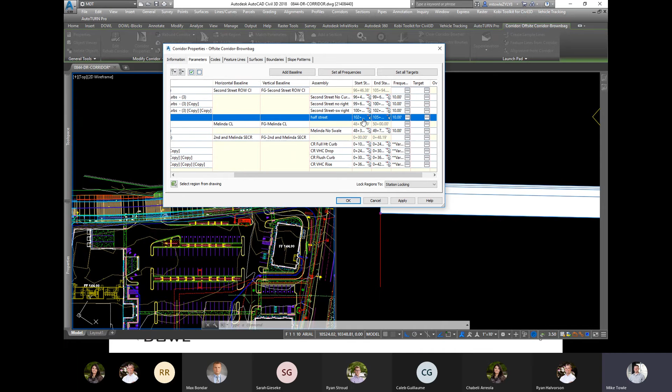I am still going to be working with Sean to try and figure out a better method for half streets. And I'll try and explain the difficulty that we have. So if you have a roadway that needs a curb and gutter, again, we generally build out from center line, because that's how it's easier to display the stationing and the profile that's needed for the jurisdiction.

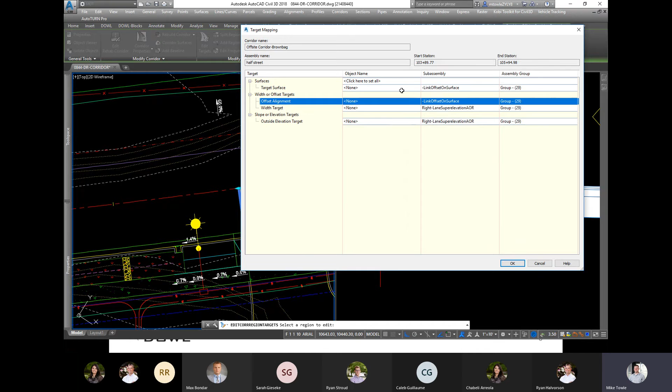Yeah, this is the one you want. You want link offset on surface. So it'll basically start at an offset, and you tell it what surface to start at, and then it'll build the lane from there. So that's the best one for starting at a saw cut, but still basing it off center line.

Sorry to sidetrack. So the issue that we have is when you have a curb and gutter, generally on a half street, you are designing the flow line profile because we don't have a finish grade profile that's going to be a consistent road slope across the entire section. So you may have an existing road that varies from a cross slope of 1% to 3%, and to get longitudinal slope on your roadway, you may need to vary the cross slope of our road section as well.

So the issue is, in order to model that with a corridor but get the gutter pan modeled at 8% or 5% or whatever the jurisdiction detail shows, because the corridor always builds from center line out, you actually have to model your flow line profile, or your curb profile, at the edge of gutter pan rather than your flow line, because it's going to go from your center line or your saw cut line, and it's going to set a variable slope on your lane piece by targeting that profile at the edge of your gutter pan.

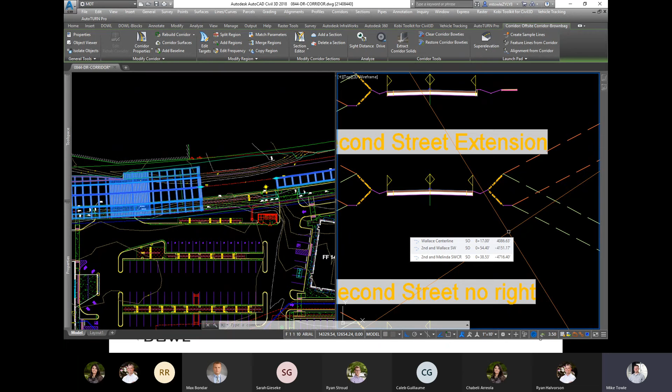And while I've got everyone, I'll take one more minute here. There's one way you can limit the number of sections you have and the thought that's required on whether you're a cut or fill section or a cut or fill catch. In our case here, where we had a V ditch on one side of the roadway, if we're a fill section, we needed to do something different than if we're a cut section. So there's what they call conditional sub-assemblies for cut and fill slopes.

Instead of just doing a daylight at this point that would either look down at 3-to-1 or up at 3-to-1, it calculates if you're a fill or a cut, meaning if you're above or below existing grade or whatever your target surface is. If you're a fill, it'll add a bench, or whatever you want, before it daylights. If you're a cut, it'll just catch up to existing. So you can use the corridor to build multiple things depending on if you're in a cut or a fill scenario.

And I suppose you could use those for walls and things as well. If you're a fill and you're right up against the property line, you need to do a wall. You could set those up in a number of different ways. So I just wanted to touch on what a conditional subassembly is, because those are helpful on a lot of different cut and fill scenarios on the perimeter.